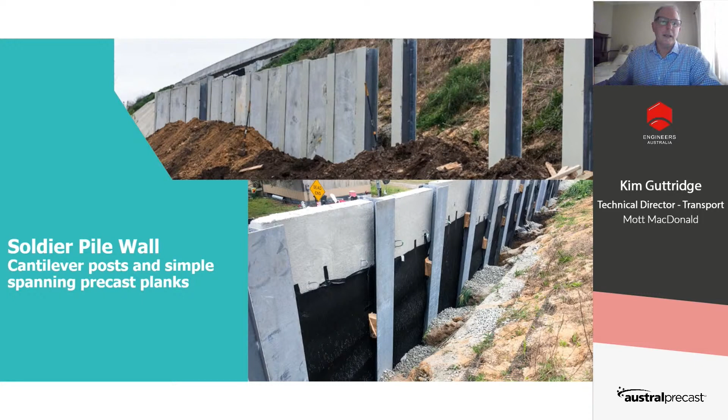So the next slide here, it's showing you the Caulfield to Dandenong project, where we had 4 kilometres of embankment, some of which was retained with post and panel systems. It's very similar to the previous slide, but you can see that it's retaining a train embankment. So this automatically gets a more important criteria, and therefore we are designing to a 100-year design life.

So to cover off some of those features, you notice the difference in the front of the wall. We're controlling the water and ponding and the splash zone. And we're providing a corrosion allowance on these posts, which are much thicker than the previous ones. And behind, we've also got good drainage. We tend to use AS 5100 for these 100-year design life structures in the public realm.

So the Earth Retaining Structures Code allows a 1.25 factor for multiplying earth pressures to increase your earth pressure distribution, whereas recognizing the longer life and the higher probability of a higher load, AS 5100 ensures that you multiply that load by 1.5, so a bit of a difference there.

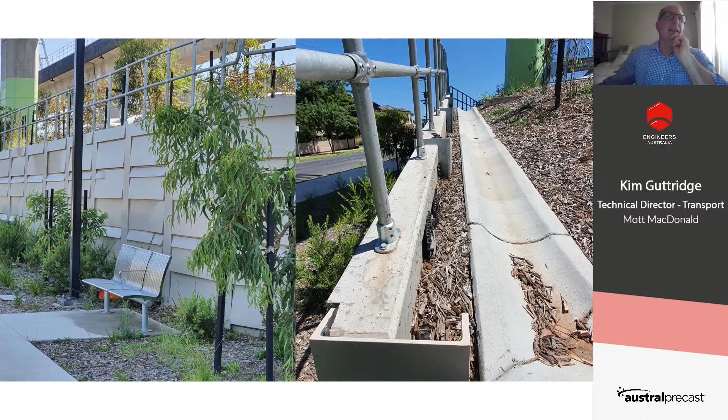Next slide, we have the same project, Caulfield to Dandenong, where this is a lesser important wall, where we may have designed this with a lower importance factor, and you can see that it has a garden bed in front, and it's not retaining the rail embankment. So it still has a corrosion allowance, I would say, and attention to detail in drainage.

In the Caulfield to Dandenong project, we have panelized retaining walls, which are popular in the scene at the moment. I'll just find it down here. We adapted what's on the market at the moment for panelized strapped retaining walls to a tension tie. This was a great innovation for sustainability, as site spoil, which was contaminated, could be used as the fill, which would be very expensive to dump elsewhere.

So the tension ties attach from this side of the wall and are resisted by the other side of the wall. There's many construction stages, but it still stacks up economically. There's this clamping and the management of the tape to prevent material falling through the strip drains, and propping to the safety code of the day.

And you notice that we also lay back the wall at an angle that's around 1 in 40. So it reduces the impact of the wall when you're standing in close proximity to it. So don't forget, this is the public realm here, and so it is a piece of architecture. Laying back the wall also allows for displacement to occur, because the tension system requires a bit of displacement to take up that load.

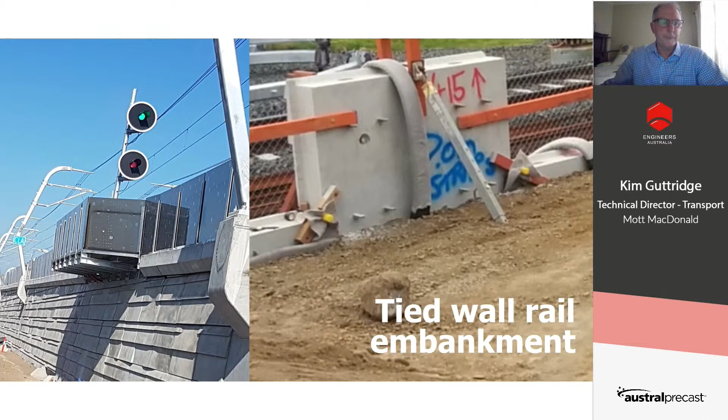The next slide shows the tension ties here, and the piece of equipment that allows this to occur with fixed connections into each panel and running across the earth fill. It's important to note that we are observing the 100-year design life with enhanced durability on the straps and the knuckle. This is a bitumen wrap around, and I think all the elements are also galvanized.

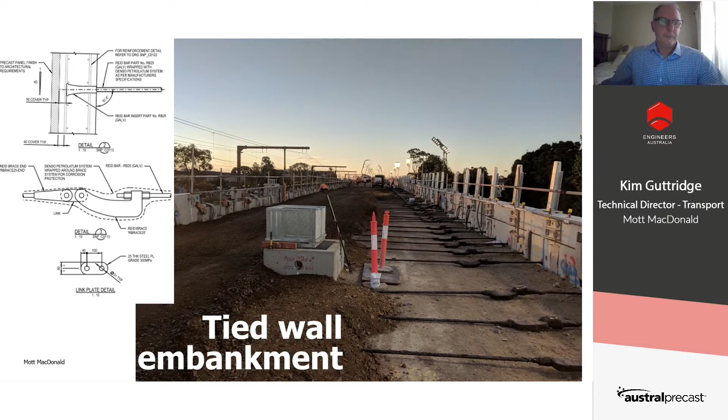So bear with me while I get this information here.

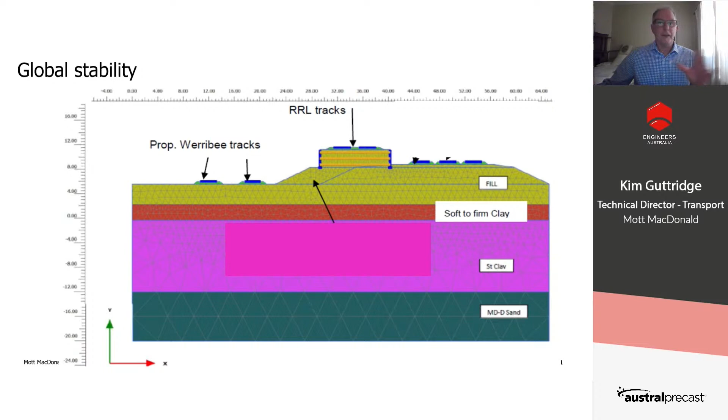Onto excavated walls. This is the Springvale Road grade separation. With the state government's push on level crossing removal, I think every retaining structure known to man has been constructed in this city in recent times. But last year, Chris mentioned in his Why Walls Fail talk that a wall of this type carries a whole lot more risk in design and construction due to the unknown conditions of the natural ground, whereas the above ground ones are filled to engineers' specifications.

Anyway, this wall features on the left 900 millimeter diameter soldier piles at 3 meter spacings, and it's constructed by the CFA method.

We're temporarily propping the wall at the top, and the props are removed once the base slab is cast. So that's a medium-sized excavation up to around the 10-meter mark. I would tend to call them a medium size, where you may or may not have props.

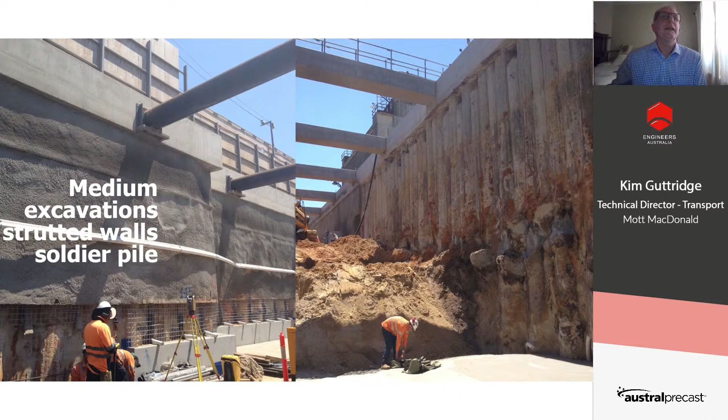On the right, there's a 900 diameter secant pile wall. It's the same job, just a little deeper in the excavation, but also it's retaining quite a bit of water, groundwater, at the level where you see the bulbs of concrete coming out. That is the CFA method, not enjoying that change of stiffness in the ground. And so that wall is over 10 metres, and it required permanent props, as you can see at the top.

Moving on to bigger walls. Sorry, just catching up down here.

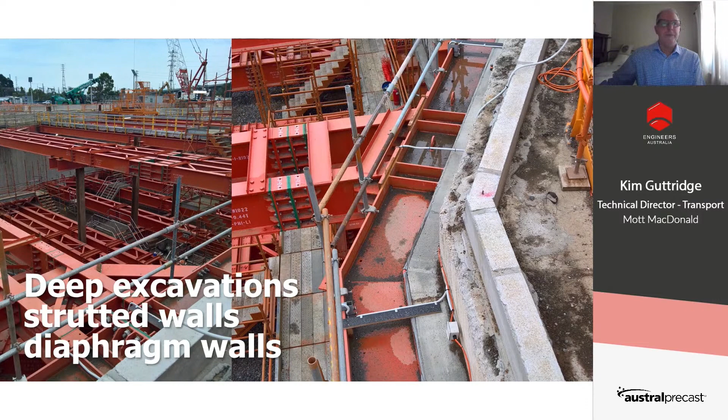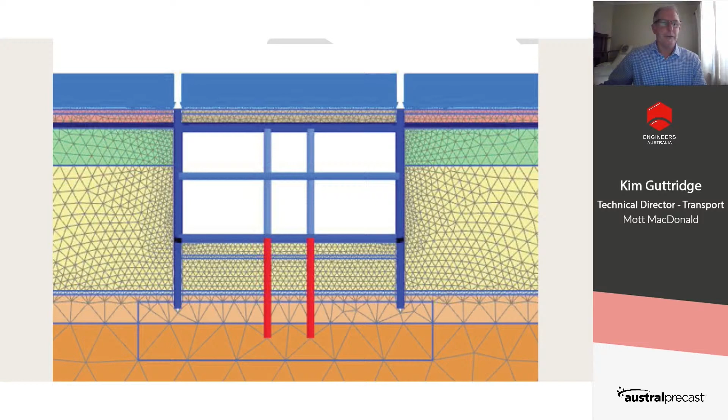Moving on to something more sophisticated is three-dimensional modelling on the right. So if you want to capture those forces, corners and stiffening effects in the other direction, you can with three-dimensional modelling.

The capture on the left is a very important step for structural engineers and geotech engineers to document the controls to the builder in their design set. So soil levels and water levels are very important to label, propping levels, assumed loads, and anything else that you can think of. So it's very important to capture that and put all your assumptions down.

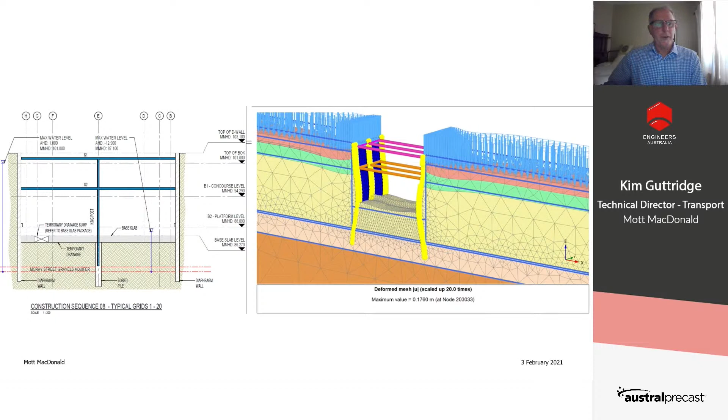And when you get very good at it, you could possibly do something like this, which is the Queen Victoria Hospital in Lonsdale Street, which was quite a while ago now, 15 years ago perhaps. I was very impressed with it, and it probably spurred me on in my career.

So this is an island of stressed anchors through the retention wall. So they are piles and panels that have anchors which are actively stressed, known as active anchors, to try and mimic the original confinement or the in situ stress state of the ground so as not to disturb the heritage building sitting on top.

Fairly economical to build, especially when you have a broad site like this, where propping is definitely inefficient. Temporary propping. You can see that the floors there are going in, and once they're built, those anchors can be de-stressed. Often, though, the anchors tend to be at least as long as the height of the wall, and where that extends beyond the boundary or into poor ground, you can't use that solution.

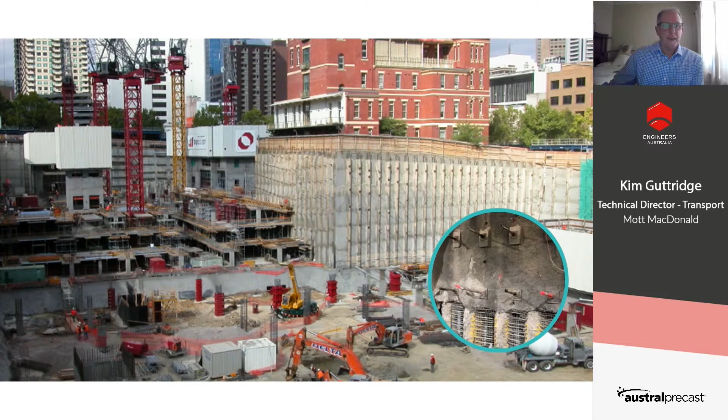All right, into a bit of theory. Just quickly, this is the gravity L-shaped wall that I was talking about. Some of the terms that structural engineers need to have under their belt are Ka, K0, and Kp. So Ka is the active earth pressure coefficient, and Kp is the passive earth pressure coefficient. Ka is associated with the least earth pressure forces. So here's the sloping line. There is the pressure distribution that you were taught at university, I'm sure.

So the benefit of the precast L is that it's very simple to precast. It is trending in modern parlance at the moment. Architectural finishes on the front, maybe up to 4 meters high with low surcharge at the back. Surcharge is the same as live load. So these walls tend to fit into that category.

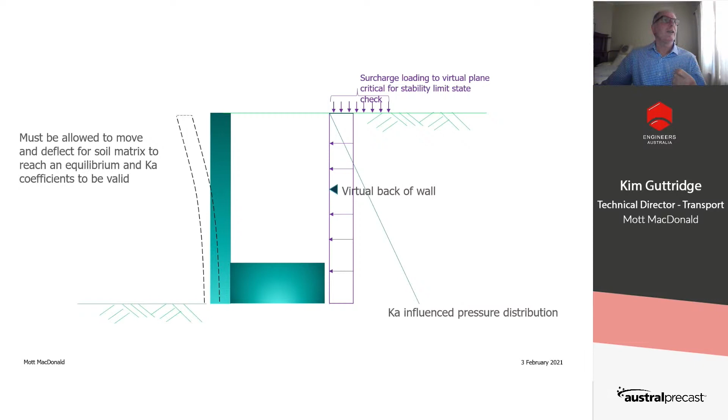The problem we had on Caulfield to Dandenong was that once we put them with a high surcharge, we had to use at least 10 or 20 kPa at the back. And if we plonked that at the virtual plane, as shown there, we generally got a sliding issue. So they weren't the best after that sort of proportion. So Ka requires the wall to move to develop that low pressure.

Next is some Kp demonstration here. The passive resistance. It's an embedded wall. It's not into a rock socket, it's into some ground. It's the largest of the earth pressure distributions, and you can see how the wall, being very stiff, is deflecting outwards in a single curvature, and therefore producing the bending moment diagram you see as classic, tension on one side, and you can clearly see the failure mechanism there is toe rotation.

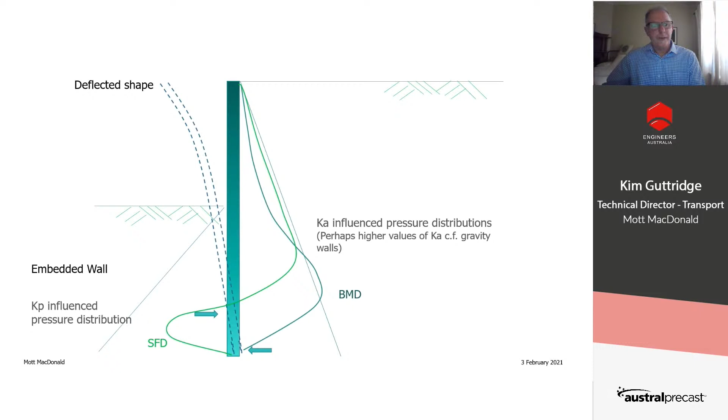So if we introduce a stiffer structure again and prop it, we end up with this situation. And I've also introduced compacted ground behind here. So it usually gets compacted in layers, and that can produce an artificially high locked-in stress, which, by the way, if you refer to AS4678 in Appendix J, you'll find a good approximation for that load.

So you can start to think about the soil structure interaction with this arrangement. You're thinking Kp influence pressures and K0. It's not moving, it's not allowing Ka to develop, and therefore you can predict the deflected shape diagram, which I'm sort of exaggerating at the bottom there, but I'm expecting the bending moment diagram to cross from one side to the other, and the shear force and bending moment diagram crossing.

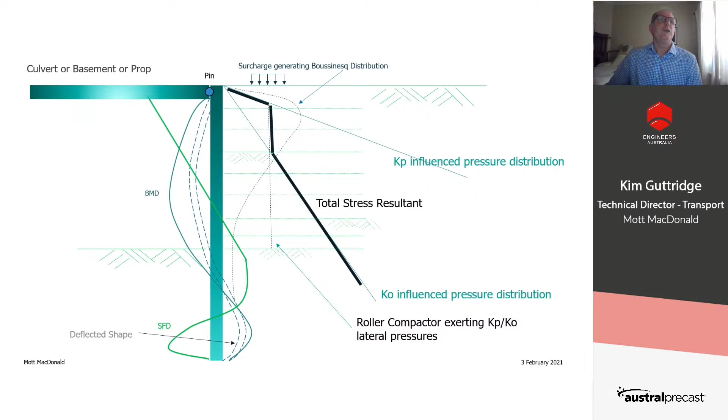If you were to add a surcharge, again, I'm exaggerating this. In my mind, the Boussinesq distribution is the most accurate representation of that. And in the end, if you follow the thick black line, notwithstanding this Boussinesq is exaggerated, you can envelope the design forces.

So, should you employ finite element and some modern methods, which we always do, using the embedded wall example here, you can see how the model does it more accurately. The geotech engineer is required to choose the inputs. He chooses soil parameters and the stiffness of the stratigraphy, any water, and then assigns the initial stressed state, K0, to the model, and then the construction activities from there on will produce Ka, Kp actions.

And so for this particular construction stage, you can see the green lines at the back is the active earth pressure that's developed, and you can see that the model has a limiting number, which the geotech engineer doesn't want to go less than, and the limiting value for Kp doesn't want to go more than that. But this actual construction stage is developing these sort of pressures, and when you arrive at an envelope, you can envelope it that way and reinforce accordingly.

It's important to note that the FEM will determine much more accurate soil deformations, and often the structural engineer then requests a rerun after this initial run in accordance with any structural limitations he or she might have on the structure. And so then it's an iterative process which will lead to a much safer, refined result.

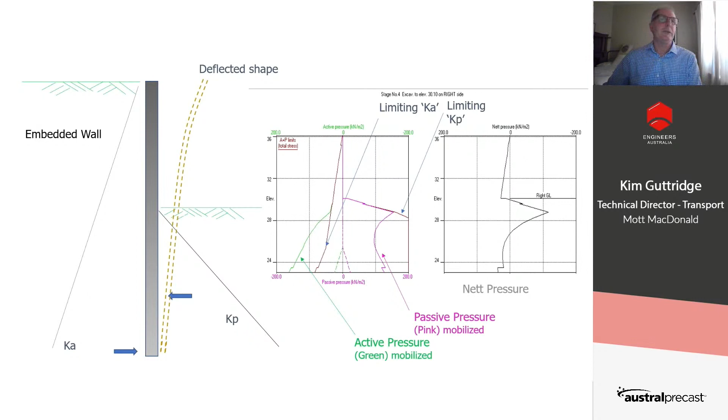What is necessary in our work is monitoring when we do retaining walls. All retaining walls, refer to the Earth Retaining Structures Code. There is a section on monitoring. This is during construction, but also in service, there's a recommendation to inspect and ensure that that structure is travelling okay.

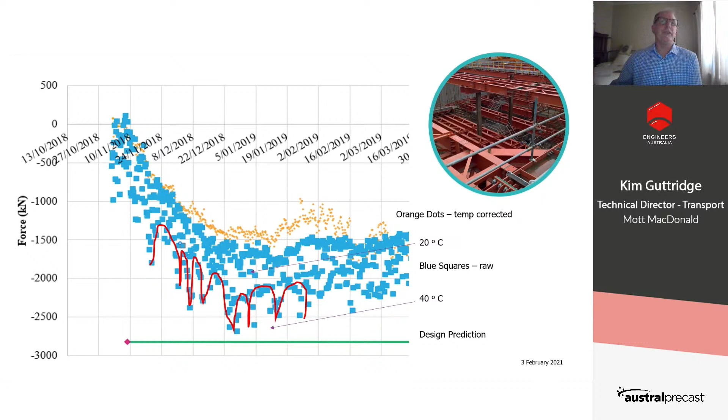This is deep excavation, and what we're monitoring here is the force in those orange props. It is measuring what we predicted in our models, and it's very good to follow up on this sort of information. So day one on the left, and the blue is the raw data, and the orange is corrected for temperature. So my red line there is plotting hot days and the prop expanding, and colder days. And we put our prediction on there, and we must have a path for action predetermined when things don't go quite right.

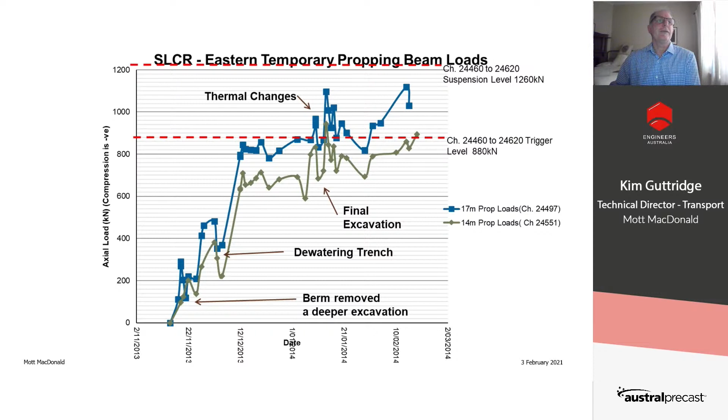So here's processed data. The previous slide was raw data. This is processed data, and so you can see that you can explain the rises and the dips, and when you start to exceed the predictions in your model, then there needs to be absolute stop work and some action in between. So that's for the project team to determine.

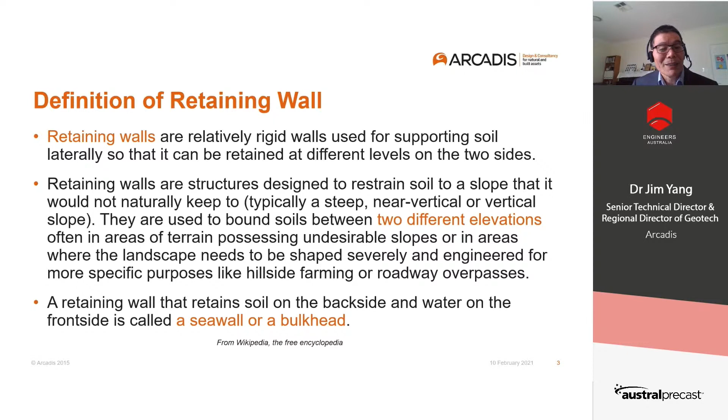It's interesting to look at what's the definition of a retaining wall. There are two main parts. One is that a retaining wall is always used to look after level differences, and that's why we need to have a structure. However, when one side is the sea or water and the other side is land, then we call it a seawall.

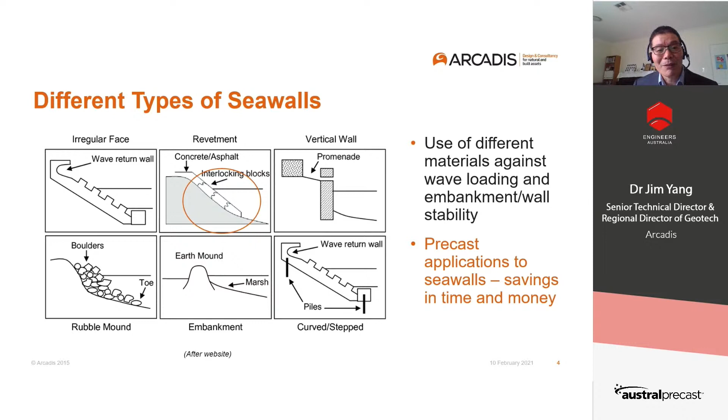And depending on the material we use, we can form different retaining revetments, retaining walls, protection walls and so on. But one of the applications we use is precast elements forming interlocking blocks to form a seawall or revetment.

What are the considerations for seawalls as compared to a normal retaining wall? For seawalls, we usually need to consider not only the earth pressure and live loads, but also wave loading, and sometimes tsunami effects and earthquake loading. And it really depends on the materials we use for the seawalls. They can be precast or cast in situ, steel or concrete.

But in terms of design, we need to consider both ultimate and service conditions, and check the sliding, bearing, and overturning of the entire wall system. And sometimes we need to consider construction, compaction, or vibro compaction adjacent to a structure.

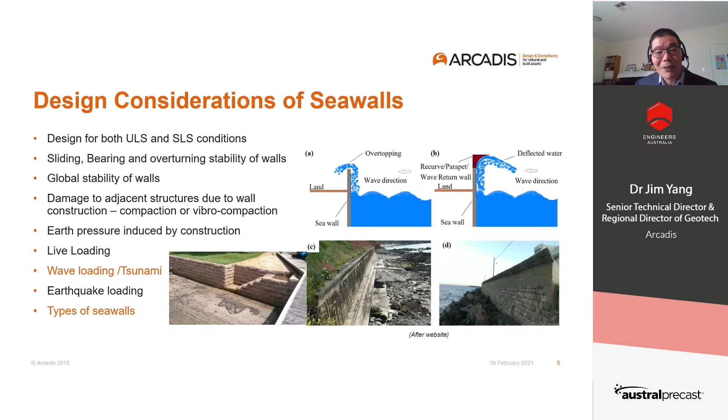I'm going to talk about a case study of the Port Botany expansion project, which was completed more than 10 years ago. The client is Sydney Ports Corporation. The advisor to the client was AECOM, and the builder was Baulderstone and Jan De Nul. Arcadis was the principal designer, together with Scott Wilson, Golder was the geotech, and WSP was the project verifier.

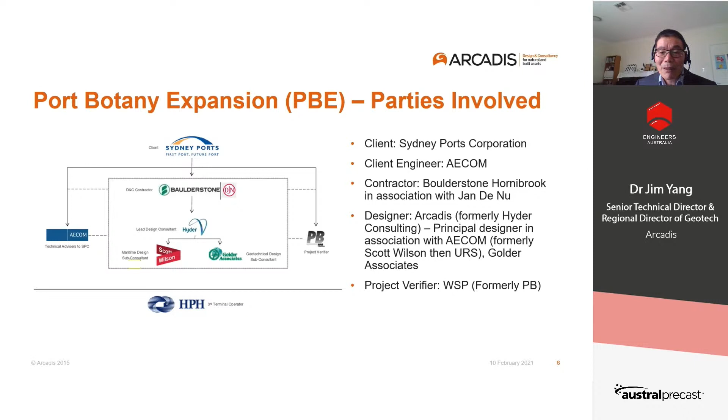First of all, let's look at what's happening in the Port Botany area. It has a long history. At the very beginning, Sydney Airport was constructed through reclamation works, and the first runway was completed in 1975. Then Port Botany work started, and by about 1984, the port facility was completed. And then in about another 10 years, the Sydney third runway was completed.

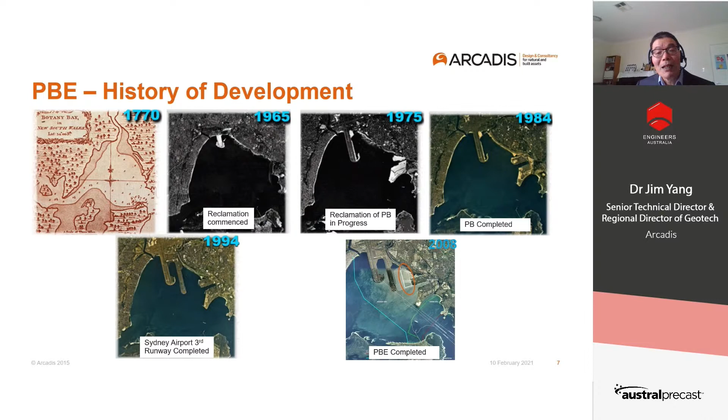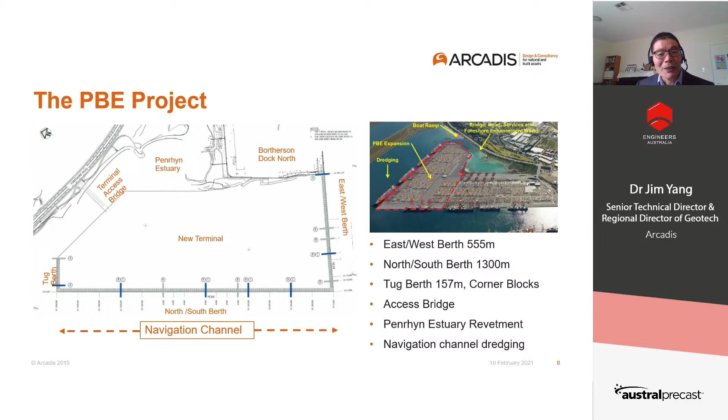The last slide shown there, around 2008, is the Port Botany expansion work happening between the third runway and the existing Brotherson Dock area. You can see there. So the scope of work of the PBE project is to complete a north-south berth, east-west berth, and a tug berth, the revetment works, and a bridge access to the new reclaimed container yard. But this contract is primarily the civil works.

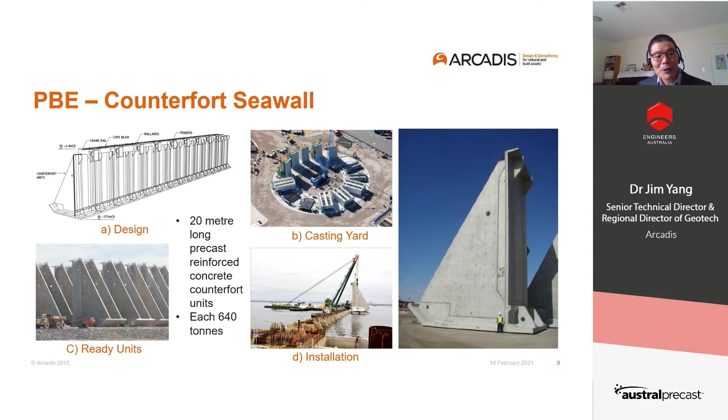Because the original Brotherson Dock was constructed using a caisson system, the first option we looked at is the precast counterfort system. This shows basically a series of caissons stitched together through a capping beam. And that's the precast yard there. This shows how each caisson is placed into the sea. In this picture, a person is shown compared to the height, which is 20 meters, to demonstrate the sheer volume; each counterfort unit weighs 640 tons.

For the main requirements of the PBE project, certainly we need to consider design vessels, the bollard system, the containers behind the wharf, and also the operating cranes lifting and moving the containers. One of the particular requirements for the seawall is to achieve a 100-year design life, because the entire area is to be backfilled using reclaimed fill.

So long-term settlement of 250 millimeters at 20 years. The wall itself, vertically and horizontally, cannot move more than 40 millimeters in 20 years. And at the crane gauges, the differential between the two cannot be more than 30 millimeters. And there are numerous other requirements at different times of the project.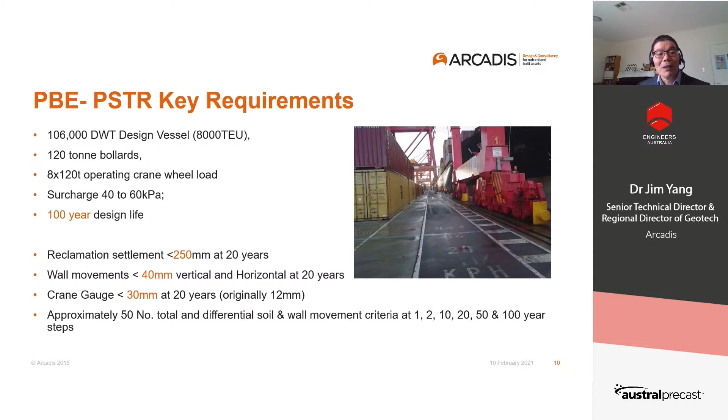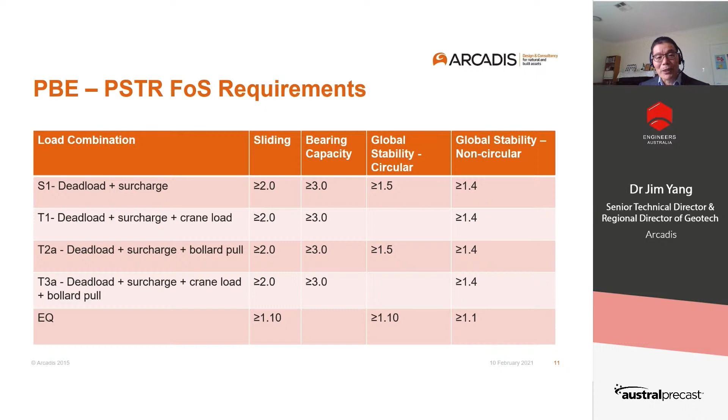And also, we need to satisfy the seawall global stability against sliding, bearing, global stability, both for circular and non-circular, under the sustained load case and also operational load case, plus the earthquake conditions. All the factors are summarized there.

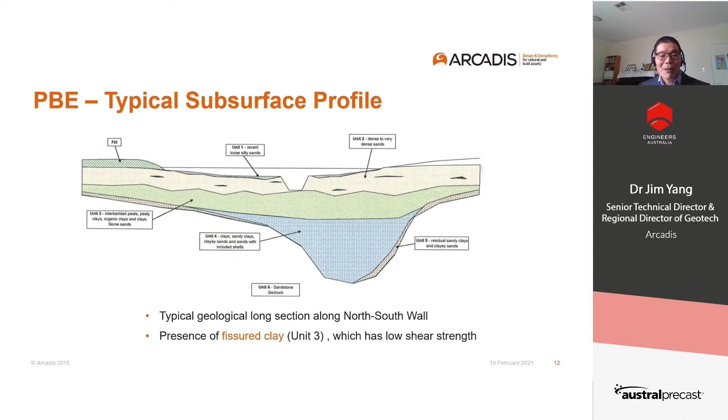So the ground condition as a geotech. So we're looking into the ground condition, and there is one layer, this unit 3 here, that is of great challenge because it's got fissured clay, which was discovered during construction of Brotherson Dock. It has very low shear strength. However, it will be the founding material for the proposed counterfort. So that's one of the challenges we have to consider.

What's the gradient level we need to consider? And for the counterfort itself, what is the earth pressure? Ka, K0, or a K somewhere in between? How can we take account of the vibro-compaction induced load on the counterfort? And what is the virtual back condition? Should we consider the vertical friction as K, same as normal friction, or 2/3 of it? What is the earthquake condition we should look at?

Because there are 216 counterfort units there, the optimization of the structural analysis has significant implications on the total cost of the project. Further to that, there are corner blocks at the northeast corner, northwest corner, and also there is a transition between existing to the east-west berth.

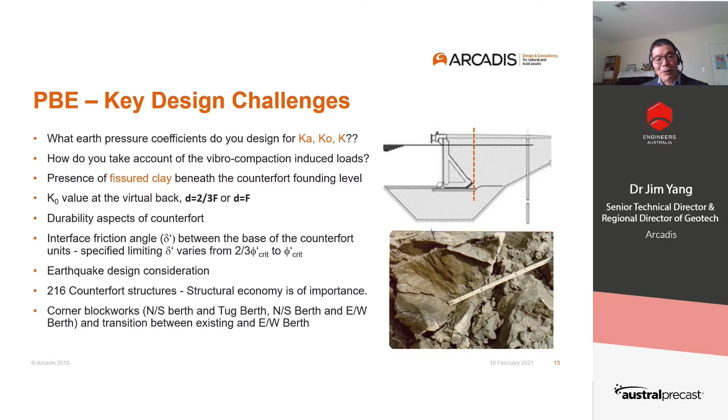And after assessment and evaluation, this is the typical cross-section we developed. So the counterfort itself is about 20 meters in height, 9 meters into the page, which is the width, and the width across there is about 15 meters.

The finish level of the pavement is at RL+4, and then the trench has to be dredged down to about RL -30 and replaced by reclaimed fill, plus the vibro-compaction. And then we use a gravel layer there before placement of the counterfort as a bedding to ensure the bearing capacity will be adequate.

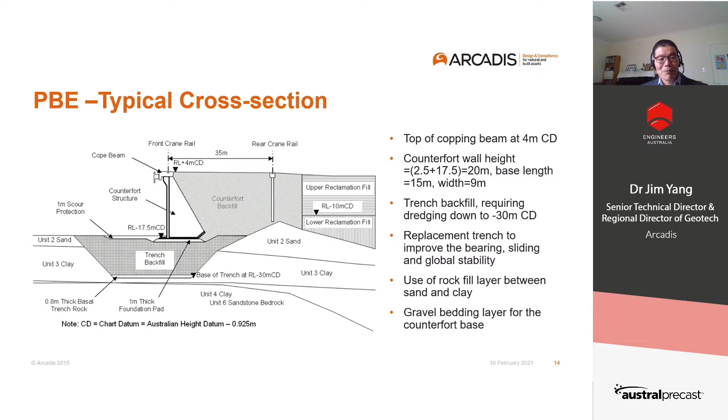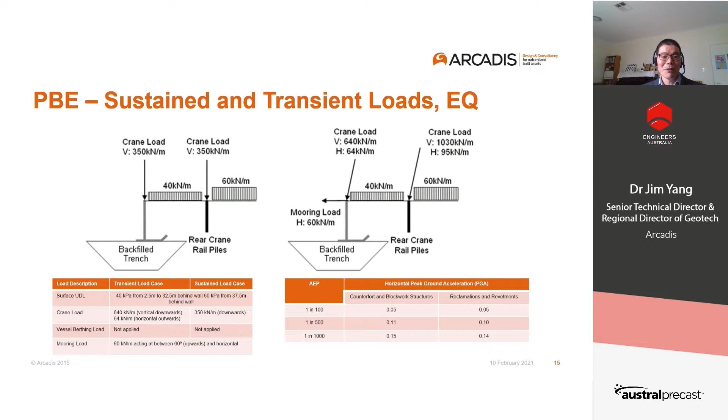The load cases we consider, there are two main load cases. One is the sustained load case, as shown there, and this one is the transient, when the ships are docked there, plus the earthquake conditions. For the earthquake, we look at the various return periods, because it's a 100-year design, so we look at a 1 in 1,000 return period for stability checks and deformation assessment as well.

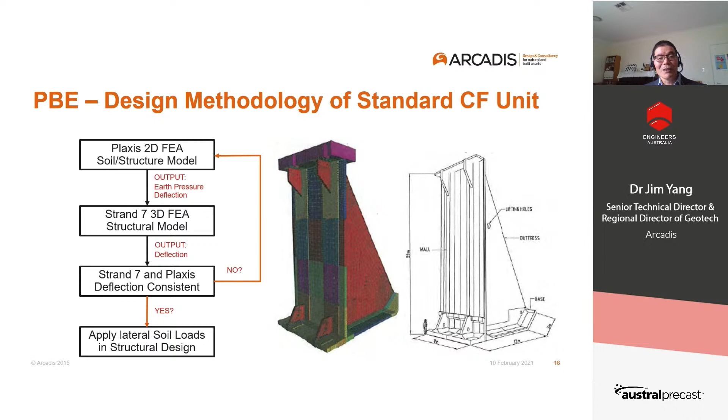The typical process for the counterfort unit assessment: I was using Plaxis to look at the earth pressure developed behind the unit, and then using that as an input into a Strand7 3D FEM structural model. After a number of iterations, until we get similar deflection output, then we can stop. Otherwise, we have to continue the repetition. Once we achieve that, that earth pressure is considered to be the reasonable earth pressure behind the wall.

Because this structure has to be designed for a 100-year design life in an aggressive sea water environment, crack width control was one of the critical considerations, and the reinforcement in the counterfort unit was very much governed by the crack width control. And after we used this iterative approach, the design team and contractor built up the confidence to put the right reinforcement in the right place.

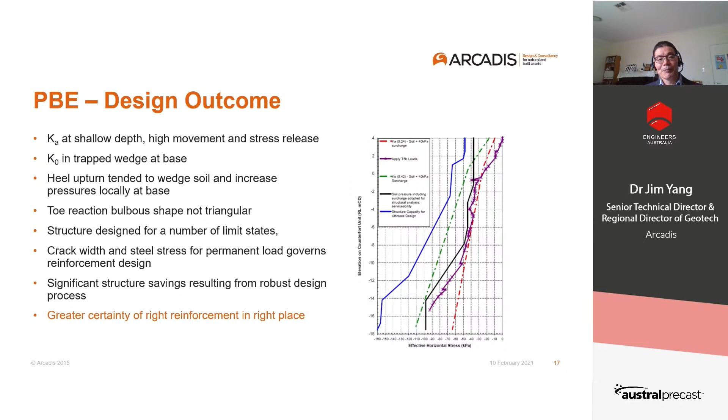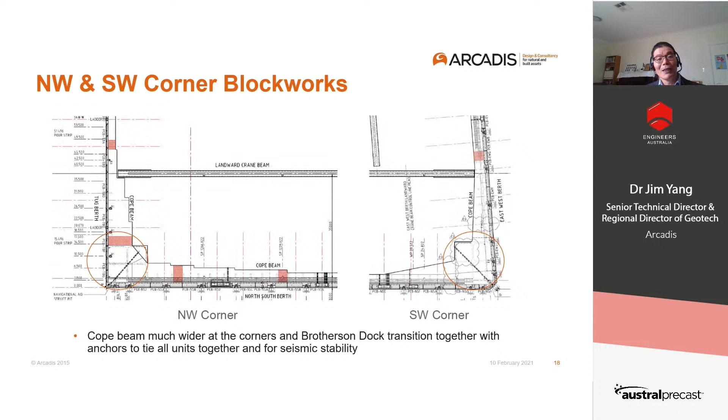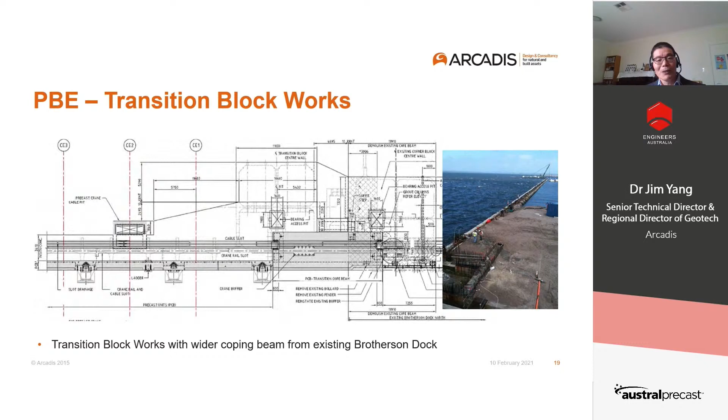Similarly, the transition from the existing to the new east-west wall also got a much wider coping beam together with the blockworks plus the infill unit put in there. And at that time, we also did Plaxis 3D modeling to evaluate what would be the differential movement and the rotational movement at the coping beam level at the corner blocks.

So we modeled the northeast and the tug berth for this case to assess the moments, and it was also found that the arching effect does contribute to the earth pressure development behind the wall. And the results were very similar to Plaxis 2D, but at that time, because of the limitation of numerical capability, we could not model the vibro compaction effects on the counterfort itself.

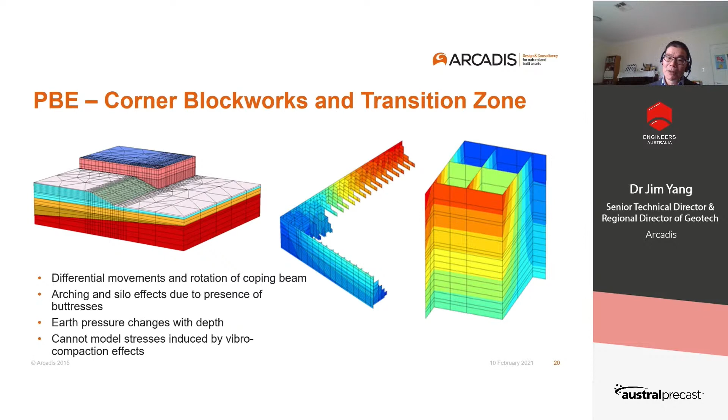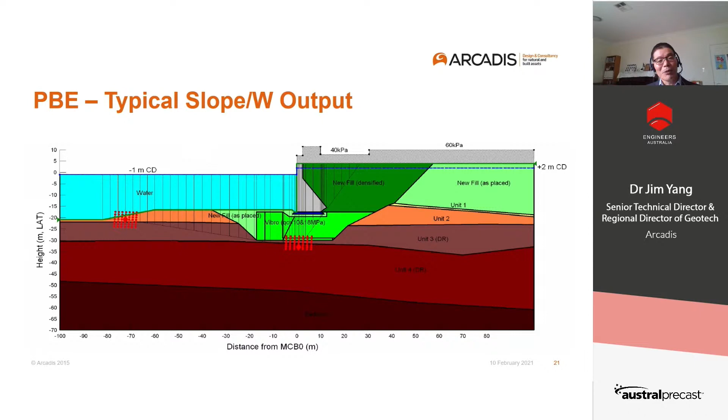After the wall is formed, we need to look at the global stability and determine if the dredging level was sufficient to achieve the global stability. This is showing a non-circular failure. We need to target a factor of safety of 1.4. This was interesting, that this was actually agreed by Sydney Ports after negotiation at the tender stage and the post-tender process.

So this slide is showing the construction sequencing in general. We're dredging to about minus 17 and then form a trench to get rid of the fissured clay. Then we put back the reclaimed sands, the yellow showing vibro compaction, with an overburden to about minus 13.5. Then we trim back, put gravel on, put the unit on, and after the wall is finished, we put reclaimed fill to about 2.5 CD. Then we did vibro compaction again behind the wall.

After that, one particular thing we did was put a kentledge load of about 300 kilonewtons per meter above the counterfort for 3 days, and a 90 kPa surcharge behind the wall for a month to minimize the differential settlement. After that, we remove the surcharge, then we build a coping beam and the remainder of the fill. And this picture is showing the vibro compaction process.

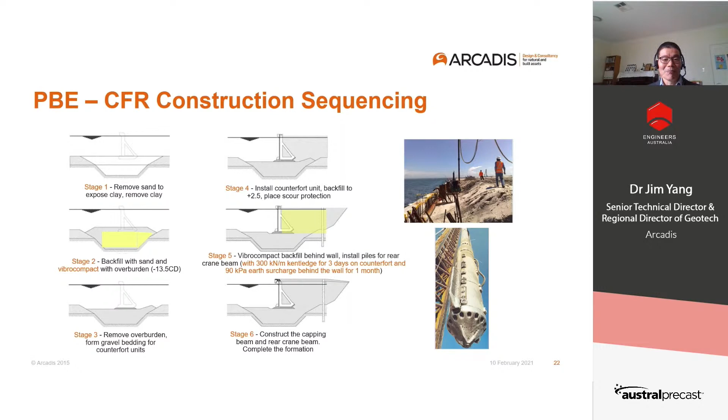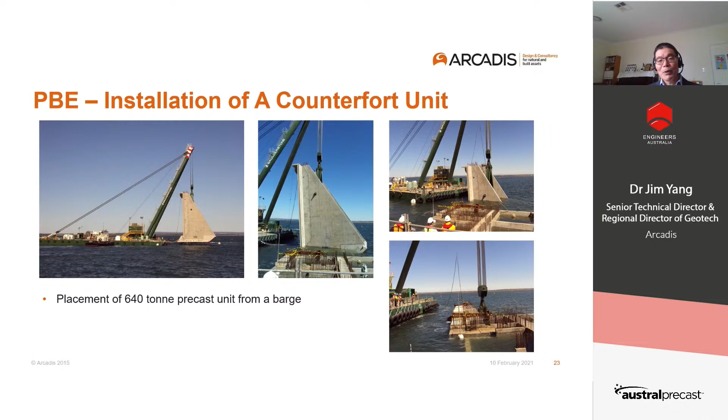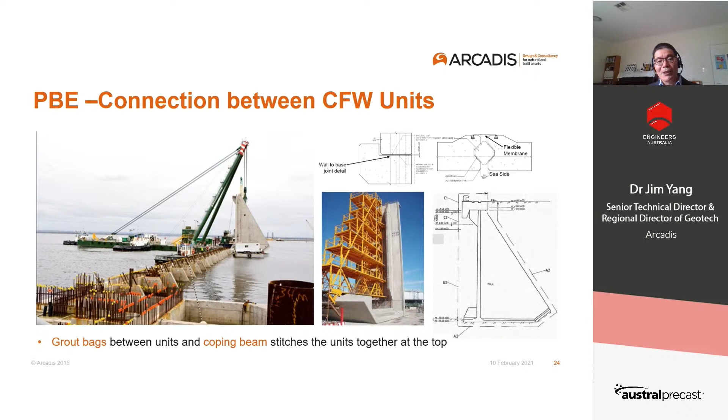And this slide is showing step by step how this massive counterfort unit was lowered into the sea. Of course, you require a very large barge to lift it and move it to the right place. But one would wonder how these units were connected. A couple of things. The first thing is there is a physical gap when the units are placed. Then there is a flexible membrane between the two units, so it will block any potential loss of the sandy material behind it. Then we have notches to put grout bags to ensure it provides strength as well. And then we have a coping beam which will stitch the units together, acting as a wall.

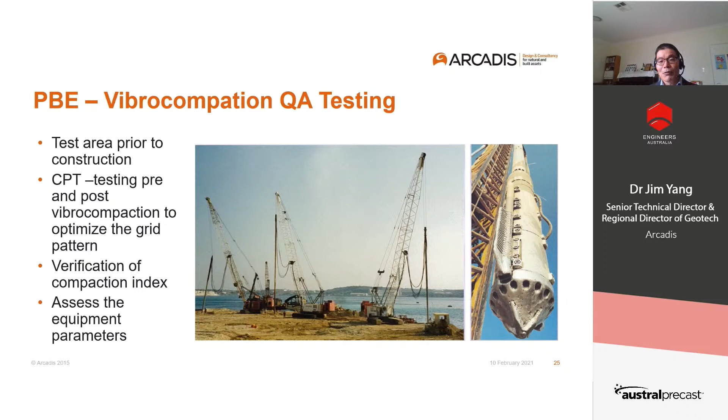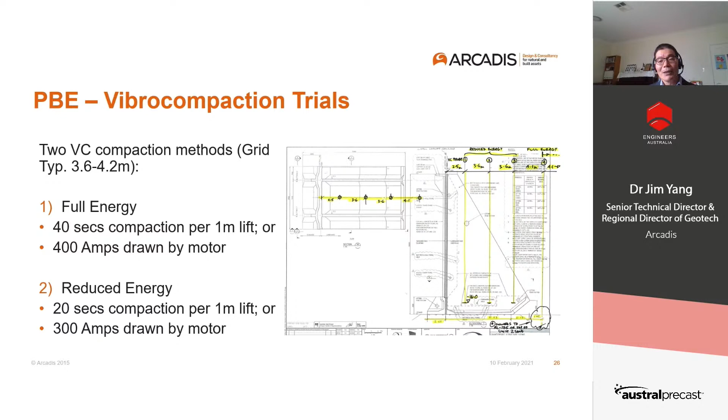As part of the reclamation works, vibro compaction QA testing was very important. First of all, we established a trial site, using CPT profiles before and after vibro compaction to optimize the grid pattern, what's the spacing, and also to verify the compaction index of the sands and determine the right equipment to use for the vibro compaction works. This is showing a trial pattern, different grid spacing, and different energy levels: full energy and reduced energy, because we're close to the wall. We don't want to push the wall too hard, as it will induce lateral movement, which we're trying to avoid.

We put load cells behind the walls to check what the stress increase is during vibro compaction. As you can see, it's almost double the earth pressure during that process, but it is less than the structural capacity, because it's a transient load and only lasts for a few seconds at that particular location. What we found is the post vibro compaction earth pressure is quite close to the original, which matches the predictions, and that gave us the confidence to finalize the vibro compaction patterns and the equipment. For the ones very close to the wall, we used the reduced energy to ensure the wall is not pushed out towards the sea too much.

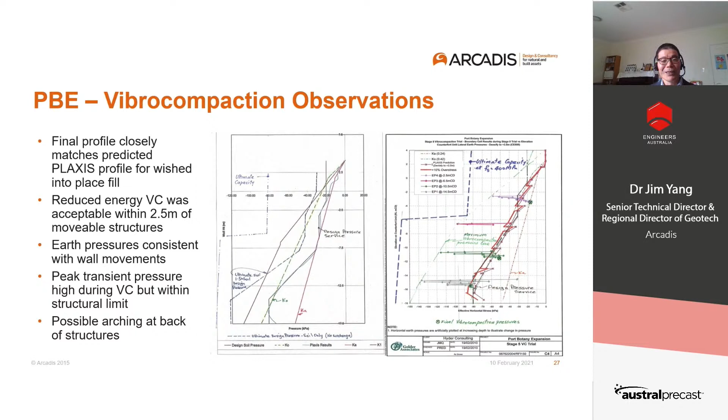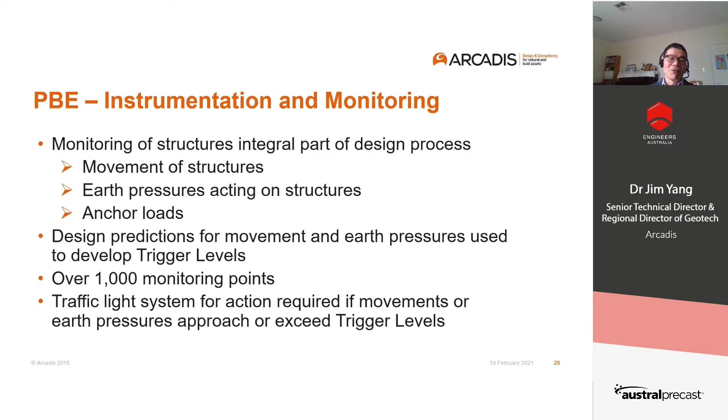And of course, like any geotech or earthwork project, instrumentation monitoring is the key to success. There were more than 1,000 monitoring points, and the main elements to check were the movement of the structures, counterfort, coping beam, and so on, and also the earth pressure developed behind the structure and the anchor loads. We adopted the traffic light system together with mitigation measures if the trigger values are exceeded.

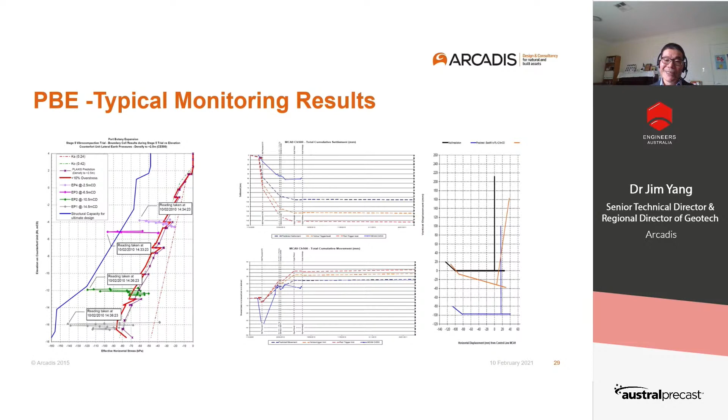This is a typical monitoring result. We spoke about the pressure increase during vibro compaction, and this is the monitored settlement at chainage 550. You can see the wall movement is very close to the prediction, slightly less, at one point a little bit more, but overall the settlement is a bit less. I think that's largely due to the preload or surcharge we applied.

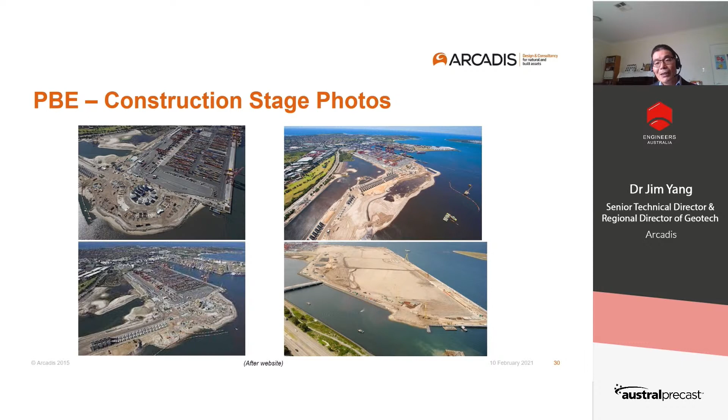And there are a few more construction stage photos. So this is where the precast yard was established first after reclamation, and as construction progresses, the reclaiming area is getting bigger, and more counterforts have actually been formed, and this one is getting closer, and this one pretty much shows the complete one. And this shot I just got from Google is almost finished, and this is the sort of finished product of the wall.

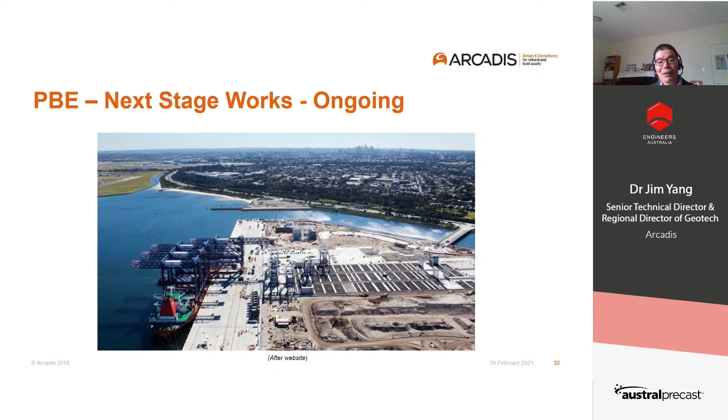And I just want to recap the key things in the design of these massive sea walls. So innovation to the code of practice. It's very important to use state-of-the-art analytical tools to assess and build up confidence in design. And this project has shown that the precast technique is very powerful to save time and money when you're building up these massive retaining walls, and also to enhance the quality of concrete, to ensure the durability aspects of the concrete structures.

And in terms of the dredging levels, the integrated design and the constructability assessment, we decided to go -30, which is really important because we can decide the most economic dredging tools, and we also save the volumes for reclamation and trench backfill. And the varied profile of the earth pressure between KA and K0 also achieved savings in the counterfort unit.

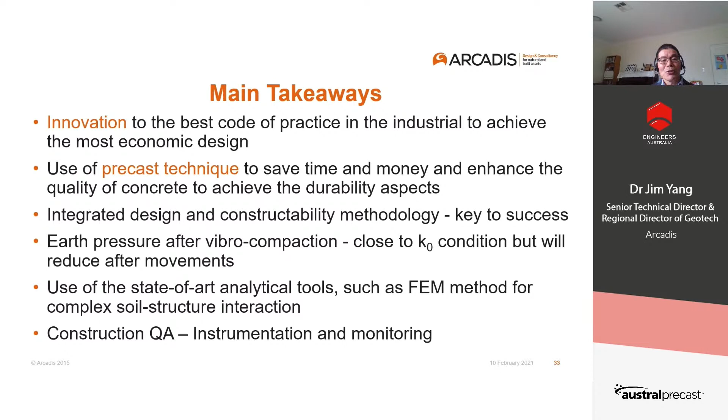And as always, in geotech and earthworks, instrumentation monitoring gives us real-time feedback so that if something goes wrong, we can take mitigation measures, and hence make sure the project will be successful.